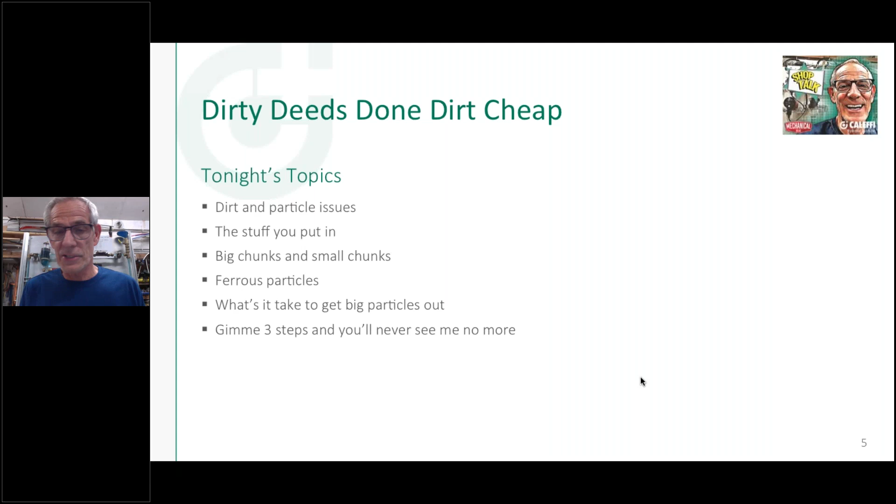I wanted to clear up a couple things I talked about last week. One of the things that's going to come into play a lot as we talk about things is the velocity of the fluid going through the system, the speed of the water, basically miles per hour - think of it that way. We talk about velocity of fluid in feet per second.

And when we start sizing pipe, I found if you go to this website, engineering toolbox.com I think, they have all sorts of calculators like this one right here, because I know there's some rules of thumb, like how much flow can you put in a 1-inch pipe, or a 1.25 inch pipe - is it steel pipe, is it copper pipe, is it PEX tubing?

I think if you go to calculators made specifically for that tubing, you'll find out you can get some pretty good flow rates. Like right here, I've heard for years that maybe 12 gallons a minute is about the best you can do on 1.25 inch copper. Well, actually, if you look at type M 1.25 inch copper, you can get up to about 18 gallons per minute, about 17 gallons per minute, and still be at that 4 feet per second velocity, 18 gallons per minute, and still be around that 4 feet per second velocity.

So where you can get a little balled up on this, if you look at PEX, because the inside diameter is quite a bit smaller due to the wall thickness, even though the outside is still copper tube size, you can see what happens with 1.25 inch PEX. So don't use a rule of thumb and say, if I use 1.25 inch tube, I can get X amount of gallons, 15 gallons a minute, whatever it might be.

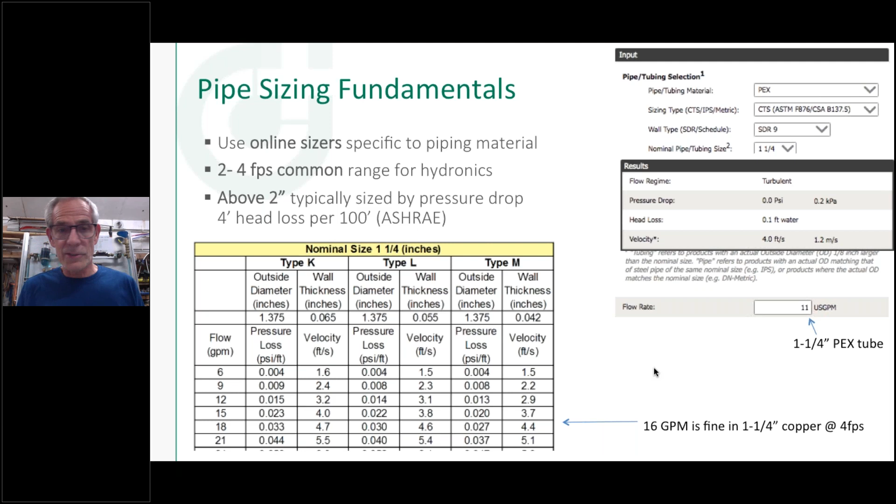This is going to be important too when we talk about flow velocity, whether you get turbulent or laminar flow conditions going through a pipe. I've got some examples of that coming up, because that has to do with how we transfer heat, and also how we get air and dirt out of solution if the water's going too slow or too fast. Going too slow, it doesn't move the dirt with it. Going too fast, it just blows it right past your devices that are intended to pull it out. So we'll look at that a little bit more.

The other thing, I got a little heat on this last week when I talked about these scoop type air purges. I said I didn't think there was a place for them in today's hydronic systems. Well, there kind of is. If you're doing cast iron boilers, this type of air elimination device works.

It doesn't get these little micro bubbles out. And to me, it's kind of like a rotary phone. Or would you buy a new pickup truck and say, I'd rather have a carburetor than fuel injection, I'm just used to that, I know how they work and this and that? Probably not. You want the best performance.

So definitely, if you're using high performance boilers, high efficiency boilers, I would go with a micro bubble type of device, because I don't want these little micro bubbles in there anywhere. So I just wanted to clear up that I'm not an air purger hater, I just think there's a better technology. I understand there's a big price difference between those two, but high performance systems require high performance air elimination.

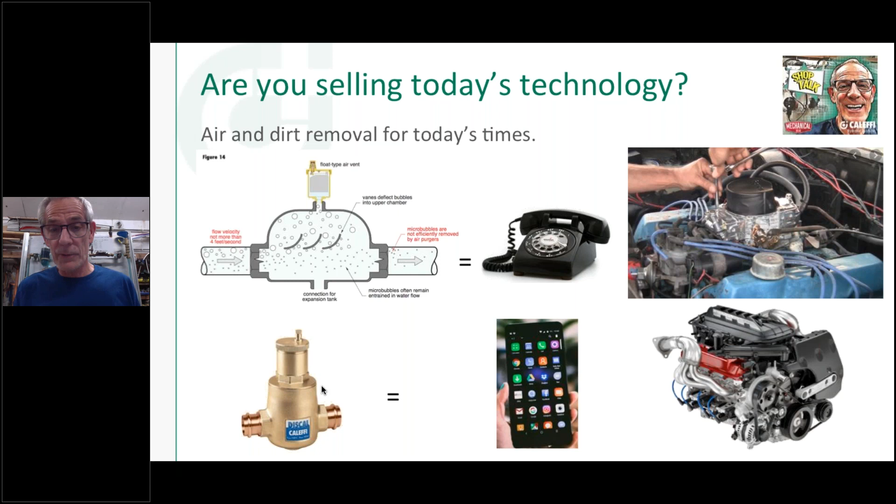Dirt elimination is what we're going to get into next. It turns out it's really about the same concept, the way we get air out and the way we get dirt out, when you see how we talk about separators instead of strainers or filters.

One last thing about these air purges: there's another thing we talked about, you want to have a little bit of upstream piping if you're going to use this type of air purger. I've heard it said a couple times that people say you want to do that so you have laminar flow here. And no, you don't.

The only way you get laminar flow here is you slow the velocity down in that pipe. In a 1.25 inch pipe, you've got to be down to about a half gallon a minute flow rate before it turns laminar. So you're not getting laminar flow just by putting a straight section of pipe in there. What you are getting is the ability for these little bubbles to start rising up, and the buoyancy of the bubble in the water takes it to the top.

So when it gets into this big wide chamber, you already got a head start on getting those bubbles up to the top so they can get to the air eliminator. You want to have that 18 to 24 inches upstream so the bubbles start to rise to the top of the pipe. It's not slowing the velocity down by having a straight section of pipe. So just be clear on that.

This is what we're looking at when we talk about laminar flow, transitional flow, and turbulent flow. If you're flowing between 2 and 4 feet per second in any size pipe, you're going to have turbulent flow, which is what we want to move the heat out. When we get to the demo, you'll actually see that. In my clear tubing, you can see how the water swirls through there as it goes down through the piping, indicating turbulent flow in the range we're going to run at, which is about 4 feet per second.

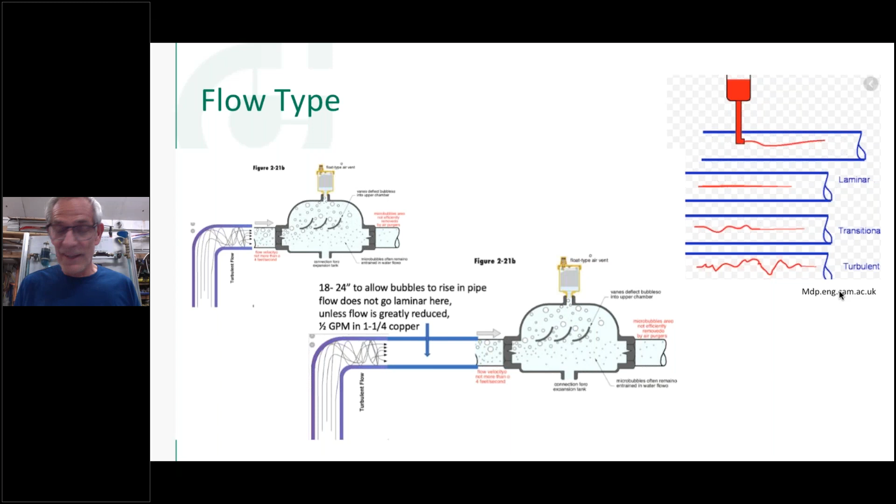So just to get that off my mind, to make sure I didn't upset people when I said I didn't think they worked very well.

So I want to make sure I put a device in there to be able to grab that, because I don't want that in my system, I don't want that in my pumps. I'll show you an example of what happens when you do have magnetite and you put an ECM type circulator that has a strong magnet in it. Guess what?

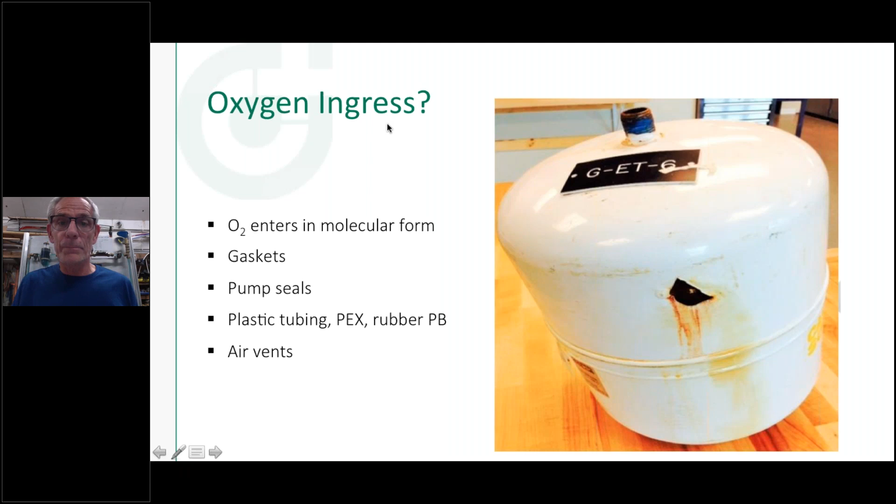So again, we talked about oxygen ingress last week - how it gets in through non-barrier tubing, how it can get in around packings on valves and stuff like that. So it does tie into the dirt and particle removal, because this is what's going to happen.

Now, I'm pretty sure that didn't leave the factory looking like that. Looks like a tank vent there. So whatever's caused this thing to plug up, it's probably not going to do a lot of air removal in that condition - something in the system caused this to happen.

And number one, we want to prevent that. We want to find out why this had so much sludge in the system, and we want to stop it, whatever it takes - we've got to tighten up our system. But also we want to make sure we've got a separator in there, so that if there is some of this going on for a period of time after we flush it out, we pull it out of harm's way. We don't want to trap it in a pipe or a strainer where it can plug up our flow rate. Now our boiler is going to go into lockout.

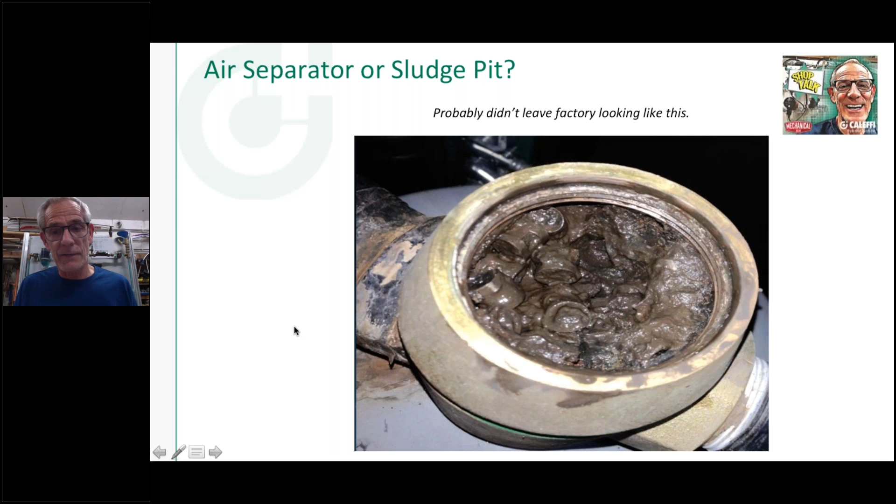Our pumps are going to start screaming and protest because they're not getting enough flow to it. So - I don't think I've got it keyed up yet - we're going to do a session on water quality.

And water quality will tell you a lot about why this happens in your systems - why you get that sludge, why you get that buildup, why you get this. Obviously this has been leaking, but these minerals that you see on the outside are an indication of what's in that water that's in your boiler.

So here, maybe you're lucky that this leaked, and you can see all these minerals in your water, because you really don't want those inside your boiler, your pumps, your piping. So we're going to show you in another water quality webinar how to deal with that and make sure that's not going on the inside of the pipes.

So probably the first place you're going to look when you see a problem like this is that one of two things happened to this boiler. I don't know if you can see it in the picture, but there's actually water spraying, squirting up - there's a couple pinholes in this.

And the first thing you're going to notice about this little Giannoni heat exchanger is, number one, it's been overheated. Just looking at it, you can see how some of these tubes are burned pretty black. Some of them are in pretty good shape up here.

So one of two things has happened: either this boiler didn't get enough flow going through it to scrub the fire into the water instead of into the metal like you see here, and either you had some airlocks - maybe some of these loops never got purged out completely - maybe there's enough flow just to keep this boiler going, but it was running too hot.

Or there was some dirt and debris that got in there and started coating out those tubes, and now you weren't getting good heat transfer from the burner into the heat exchanger there. And I actually have a little demo of that - I don't know how well I can show you this on the camera.

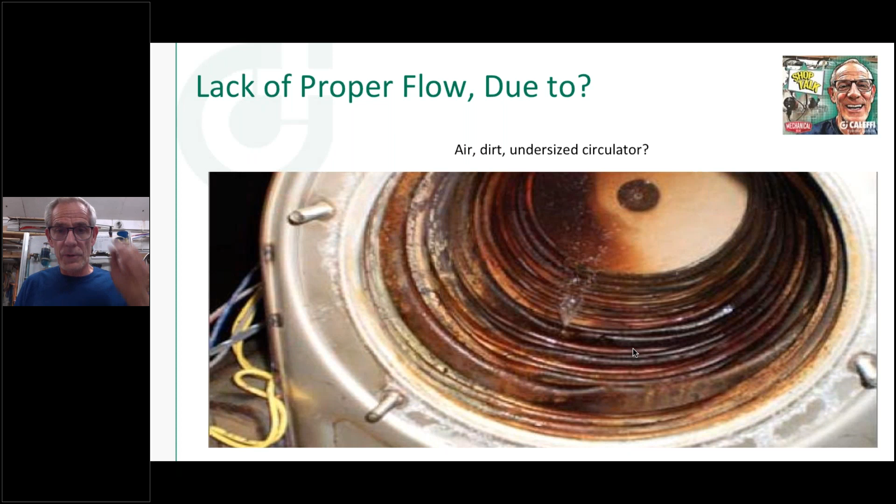Hey Bob, this is Kevin. Got a question from Bill D'Agostino. He asked if you mentioned about air getting in through the PEX tubing. What about those plastic PEX fittings? Are they going to let some air into the system as well compared to the brass fittings?

Yeah, I think he's talking about like a PEX composite fitting. That's an excellent question. I see Max is on here, I should open up his mic and maybe he could address that. He works for Rehau, but I wouldn't think so. I would think if they were using that for a hydronic application, it would have a barrier so oxygen wouldn't get through. I'm going to find out myself, because that would be a concern if you got all barrier tubing, but your fittings are allowing oxygen to migrate through the wall of it. I did clear that up - I talked to one of the experts at PPI after my last session. I asked, did I present that properly when I talked about how oxygen can get through the wall of tubing even though air can't leak out or water can't leak out? He said yeah, it in fact does migrate through the wall of tubing, driven by temperature also. So I'll find out a little bit more. Maybe Max will type in a response or call me here and let me know what the scoop is on those composite fittings we're using for PEX. Excellent question, by the way.

So again, here's an example of a boiler that was taken out of a job in Indiana, and it was going to be replaced by a similar boiler like this here. Obviously this is going to cause a problem if you put it inside of this tube. So number one, you're going to have to purge all this. This was an old iron pipe, cast iron radiator building in Indiana there. You're going to want to purge as much of that out before you put this new boiler in, otherwise it's just going to plug these tubes up, and within weeks or months you could have a failure on that boiler if this rust and scale coming out of the pipe, coming out of the radiators, is getting inside here. So a good power purge first, but also I want to put something to protect this boiler and these small tubes from any flaking that's going to go on after you leave. Because as we all know, cast iron radiators are going to flake off probably for the rest of their life. So we want to have something in there to protect your components from that.

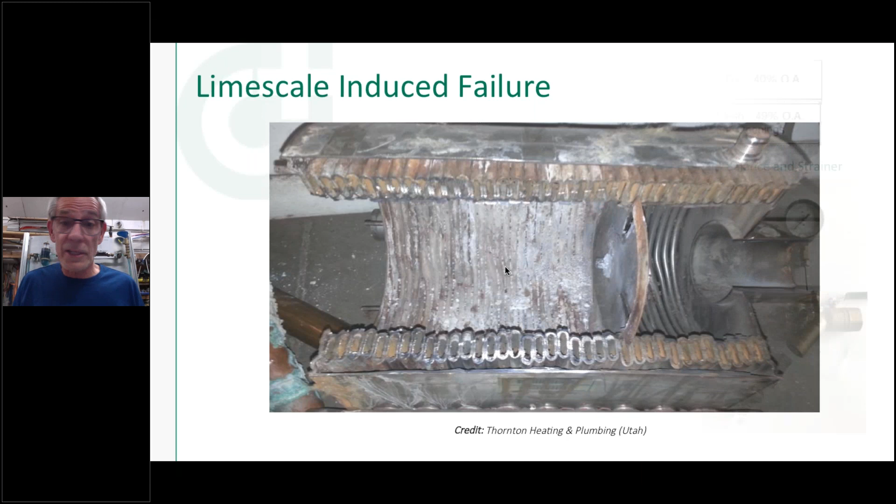So what we've been doing for years is a device called a Y-strainer. I've got an example one here, and it's a simple enough device. It's just a Y-shaped fitting like this, and we put a mesh in there. The flow comes through here, and it has to go through that mesh to get to the other side. So this basket will trap the materials in there, which is a good thing.

They work fine. The limitation of this type of device is as the strainer starts to plug up, you get more and more pressure drop going across that Y-strainer. So if I've got a pump or a boiler downstream from that, eventually I'm going to start reducing flow.

Now, when you buy a Y-strainer, you can buy them with different types of mesh. This is typical of the ones you probably find off the shelf — what's called a number 20 mesh. What that number means is if you measured an inch of that and counted the holes, it would have 20 holes per inch. That's what a number 20, 40, 60, or 80 mesh is — a coarser mesh would obviously be a number 10.

You get down to a certain size and they go to a perforated metal instead of a screen. Usually those are rated by the diameter of the hole in it. So that would be, as you can see, an 1/8 inch hole on this type of perforated metal instead of a mesh strainer.

I like to use a Y-strainer as a point of use device. By that I mean, if I'm going to put an air handler in, I'm going to put a balancing valve or zone valve on it. If you look at the opening in the side of this, it's one of our 127 balancing valves — a dynamic balancing valve.

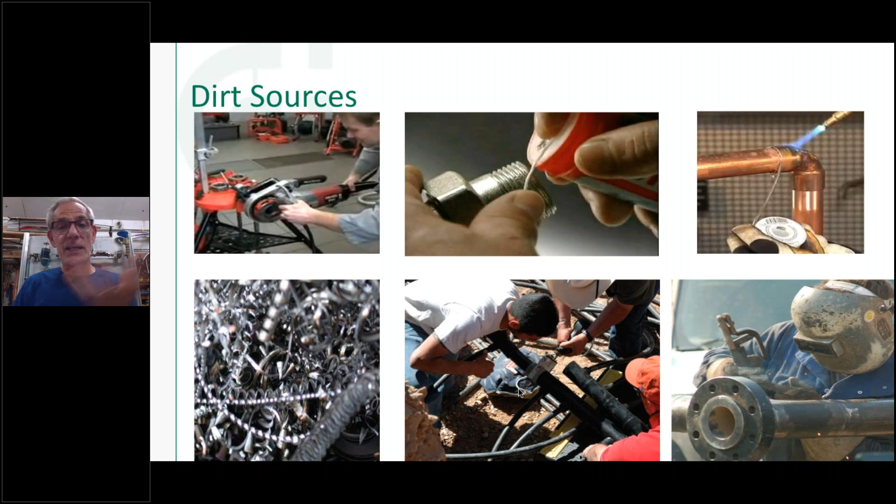So this is what we put in the systems. In addition, what's in that boiler when you get there - the boiler Kevin took out of those previous pictures - this is what could be in there. If you're threading your pipe, you might get some of that in there. If you're using Teflon tape, especially if you go off the end of the nipple and screw it together, you've got Teflon tape inside your system. If you're welding, grinding, reaming with a pencil reamer, or cutting with a bandsaw, all that stuff's going to be in your system. So we want to, number one, flush it out the best we can when we start it, but we also want a device that's going to keep track of all that stuff as it goes around in our system for years and years to come.

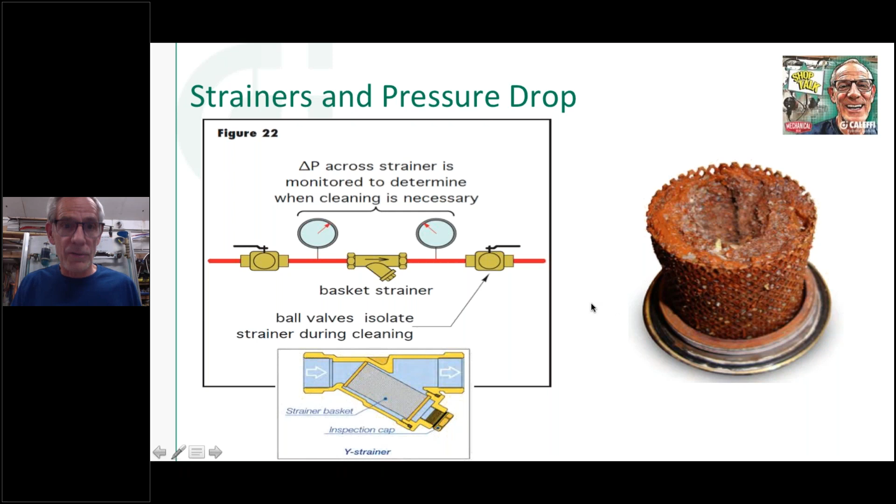Sometimes you can just blow them down here with a valve. Sometimes you actually have to disassemble and pull this little strainer right out and take a toothbrush or something to it and clean it off, because when you get 70% of it plugged up like that, you're going to have a pump that's starving for flow, or a boiler that's going into a high temperature lockout.

In fact, this was just on Heating Help, oddly enough, two days ago. Somebody wrote in, 'My indirect tank, I'm not getting very much performance - it takes hours for it to catch up. It never used to do that.' He sends in a picture, and the first thing everybody who knows this sees is there's a Y strainer. We said, 'Have you ever checked that Y strainer in the, I don't know, 15 years or whatever this indirect tank has been in there?'

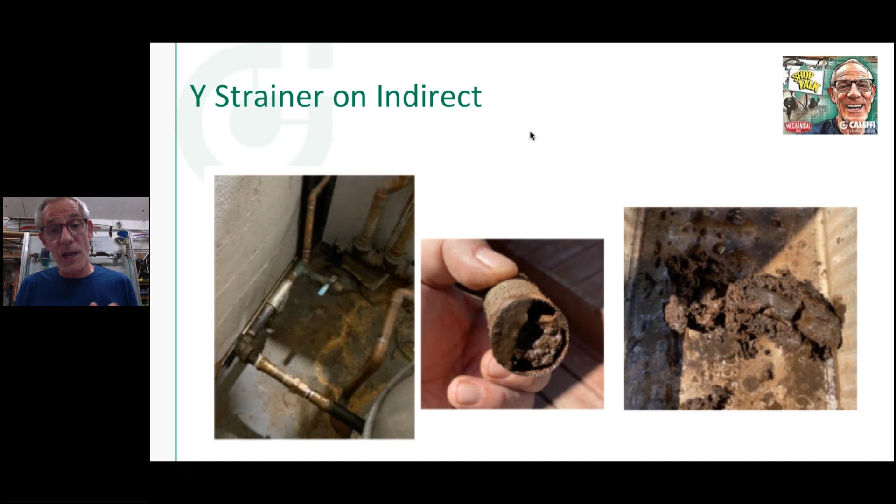And he said, 'I've never had a problem before.' Well, it wouldn't hurt to check it. And certainly that's what he found when he took it out of there - that's on a piece of paper. So obviously that wasn't allowing a lot. I'm surprised he was getting any recovery out of that indirect tank with that much sludge built up inside that Y strainer. So the Y strainer had done its job - it's just nobody ever went back to service it and take it apart.

So if you were to go buy a brand new Y strainer tomorrow with, say, a number 20 mesh in it, and you put a flow test on that and took a pressure gauge like I just showed you, you would see a brand new Y strainer just out of the box is going to have about a pound and a half of pressure drop to it. And that's because the mesh size of the strainer is just reducing the flow through it.

Now, when that strainer gets plugged up like this, the one we just showed you previously, let's call that 70% of the mesh is plugged up. Look what happens to the pressure drop. Think about that. If you've got a circulator that can only develop about 6 pounds of pressure drop, you've got no flow going through that strainer. So somebody has to go and service that strainer. There's probably a lot of Y strainers out there as we speak that need to be serviced. They might not be plugged up this bad, but the performance of everything in your system, your boiler, your pumps, your heat emitters, are all taking a hit because they can't get sufficient flow through them.

So with that in mind, we came up with this idea. We said, why wouldn't we put the same concept to use that we do in our air separator? I think we talked about this last week. So there's an air separator, and inside this air separator is this coalescing media that we put in there. Can you see that okay? So what if we took that same philosophy of slowing the flow down as it comes in, and what if we took this off the top of it?

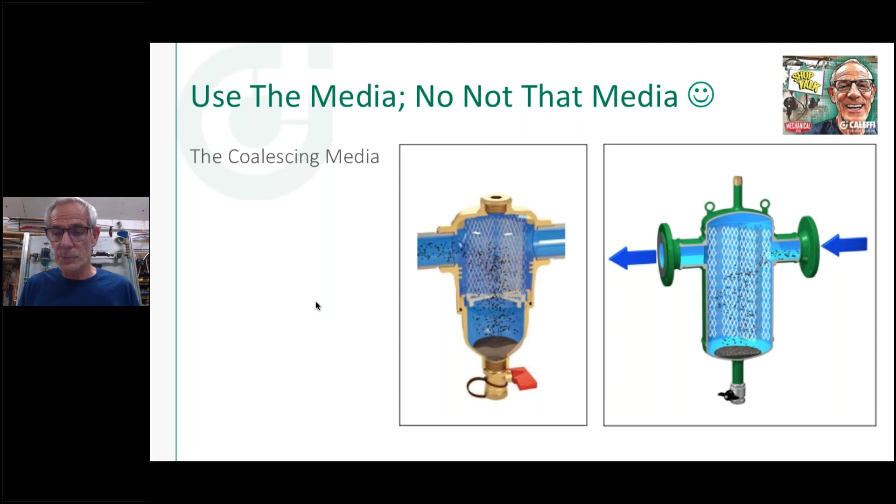And we make different ones. We make these up to 2-inch in a brass version. After that, it gets to be a lot of brass, so we go to a welded steel vessel. So we've got these anywhere from 3/4 inch up to 14-inch pipe size. So if you've got an application where you want to try a separator, maybe you've got an older system that you've had a lot of problems with, let us know. And here's an example of the range that we can cover on these separators.

And what we do when we test these, we run them at a typical 4 feet per second. I mean, that's usually the high end of what's accepted in a hydronic system. We want to be between 2 and 4 feet per second, but we'll run these things out to 10 feet per second velocity, which is way beyond what you would typically have, but it could happen.

So we check the performance. We actually bench test these at these flow rates to make sure that even if somebody overpumps one of these systems, we're still going to get good particle removal out of it.

Both of these are magnetic functions. This is the one I'll show you later on the display with the magnetic band. This one has what looks like 3 magnets going up inside of it that collect those fine particles as they go through.

So all of our magnetic separators started life as a dirt separator, and then we added the magnetic function. We feel we do a better job getting stuff out with our separator, and the magnet is the bonus to get those little fine particles, because it seems like the race is on to put a bigger magnet in—more magnets or bigger magnets than the Caleffi brand.

Well, we don't need a big magnet because we're using that coalescing media, which swirls it a little bit in there—you'll see one right behind me when we do that demo. The magnet is just getting the small particles that the coalescing media has a hard time getting, anything below about 5 microns. It's pretty tough to get that out with the media, so that's where the magnet comes in. I'll show you why that's so important in a couple of slides.

I think it's an ASHRAE standard that tells you the acceptable velocity on larger diameter pipes based on the pressure drop, not on the flow velocity going through it. It's usually about 2-inch pipe and larger where we'll get away from velocity sizing.

Bob, can I interrupt you for a minute? Yeah, this is Mary, please do. We have a question from Flavio. Flavio, if you unmute yourself, you can ask Bob directly. Excuse me, whoops—I've got too much stuff on my mic here. Okay, can you hear? I wasn't able to unmute him. Okay, I'm sorry, keep going then. That's all right, well, type it in and we can try again later. Sometimes we've got to unmute you, and then you have to unmute on your end too—it's kind of a two-step process. So we can try again, or type it in and Kevin or Mary will read it off.

Knowing that a lot of the new boilers are wall hung and the piping either comes out of the bottom or the top, we decided to come up with this device that can go on a vertical pipe. In fact, if you loosen this collar, you can make it vertical or horizontal, so it's nice that way—you can get it into a tight spacing if you've got to get all your piping right under the boiler.

Right now this is available in a 3/4 and 1 inch version. It's super easy to put in, and if you shut off these two valves, you can actually blow it down, and this lid you can open up by hand. I'll show you the one on the back when we get going, and you can actually reach in there and pull the mesh out.

Benjamin asks, do steel dirt mags as opposed to brass work as well? Wouldn't steel construction interfere? Yeah, that's a great question, because you'd think, well, isn't the whole thing turned into a big chunk of magnet? So what we do on the steel ones is this is actually a brass dry well that goes in here, and the magnet goes into that brass dry well. So the magnet isn't against the side of the metal, because yeah, you could turn that whole thing into a magnet. Then how do you get the stuff out of there?

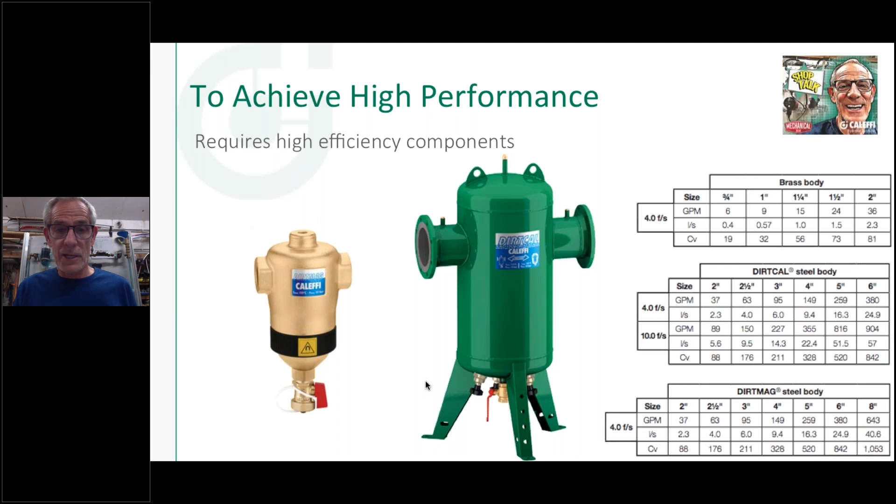So what it does on the steel ones, if you unscrew this right here and pull it out of the dry well, it's segmented so it can break, so you can get it out if it's close to the ground. When you pull those magnets out, everything settles to the bottom, and then you just open the flush valve and it comes out. Now Kevin, if you want to add anything to that, but that's the theory of how the steel vessels can work with a magnetic separation function on them. Oh, that's good, all right, thanks. Glad you said that.

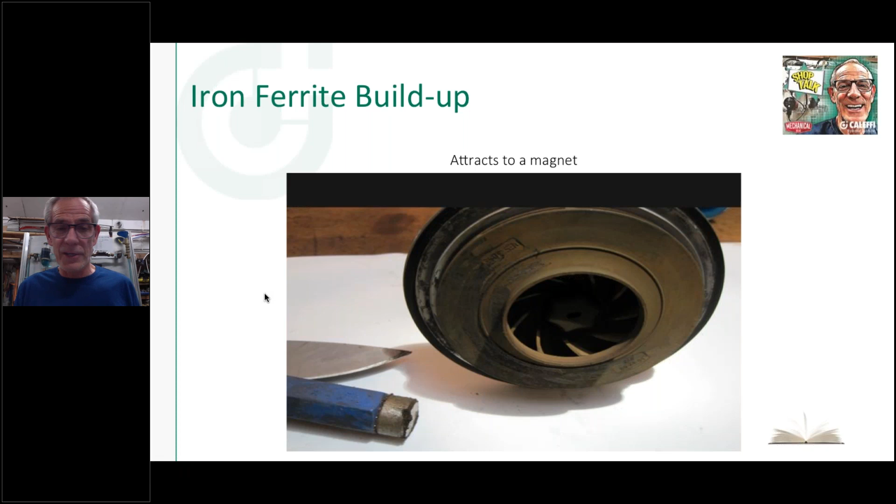This can be a problem if this pump is going to get changed out with one of the new ECM pumps, because these little particles - I'll show you what can happen to them if we've got a strong magnet somewhere in our circulator pump. So it's a simple thing to do - you probably have a magnet on one of your screwdrivers already that you could use to do a test like that. Here, doesn't matter what brand it is, this is what's called a wet rotor circulator.

And the way a wet rotor circulator works is there's a hole through the center of the shaft, and that impeller at the end - the water goes through that, and the water that goes through it ends up inside there. That's why this is called a wet rotor circulator, because this rotor is actually spinning in the water that's trapped inside.

This is called the rotor can, and this is called the rotor. When you take your pump motor off of here, you need to get a couple of screwdrivers in there and wiggle it to be able to pull that out. They come out a little hard because that bearing goes into a bushing. So it does take a little bit to pull it out.

The way this type of circulator works is there's a really strong permanent magnet motor in there. If you have something like this, you put it in there, guess what happens? Kind of looks like the bearded man on your Etch-a-Sketch. Those particles get pulled to that magnet, and that magnet's trying to run inside there, so you can imagine what happens is that's going to bind up that rotor inside there.

So if you've got a circulator that's slowing down, all of a sudden you're not getting the flow, or maybe it even spits out an error code on its digital readout. In fact, in the picture there was actually a pump that we took out of a system that was having issues, wasn't spinning. What happened is this fine powder, iron ferrite, magnetite, was being pulled through the center of this and attracted to that magnet, and it was locked up in here.

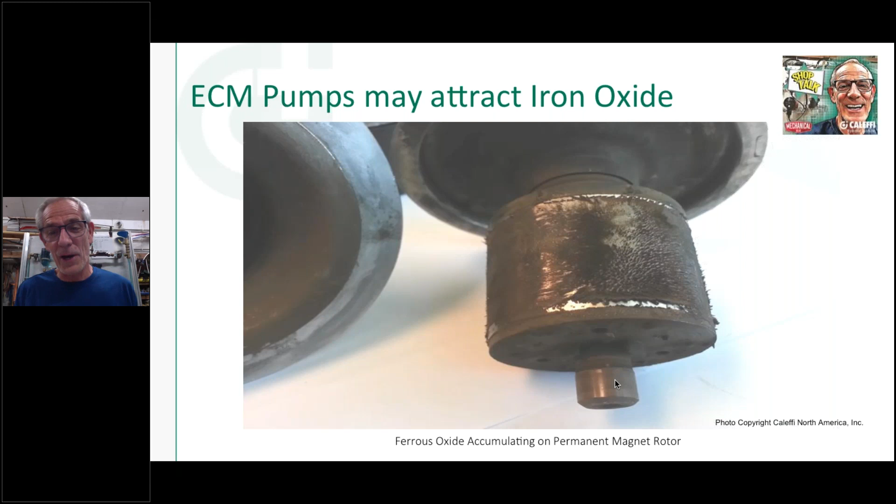I've got dozens of pictures like this. This is actually in our building in Milwaukee, and this is an expensive pump, like a $1,500 circulator. It's a larger pump, and we had one fail, so we called the manufacturer, and they said, oh yeah, send it back, it's just a software issue, we'll replace it, no problem.

I happened to be up there the day that this happened. We came in, the building was cold. We weren't getting any heat.

I go into the room and see this one pump is flashing lights. I don't remember exactly what the error code was. I said, that's odd that the second pump would fail in 2 years after the first one. Something else is going on here.

I said, let's take it apart before we send it back and see what's going on in here. So I took the bolts out, took the motor off, took the rotor can off, and that's what I found. I took a white paper towel and wiped across that, and I had a palm full of this black powder. It was almost like if you take a pencil and sharpen it with a pocket knife, that's the type of particle size we're talking about here.

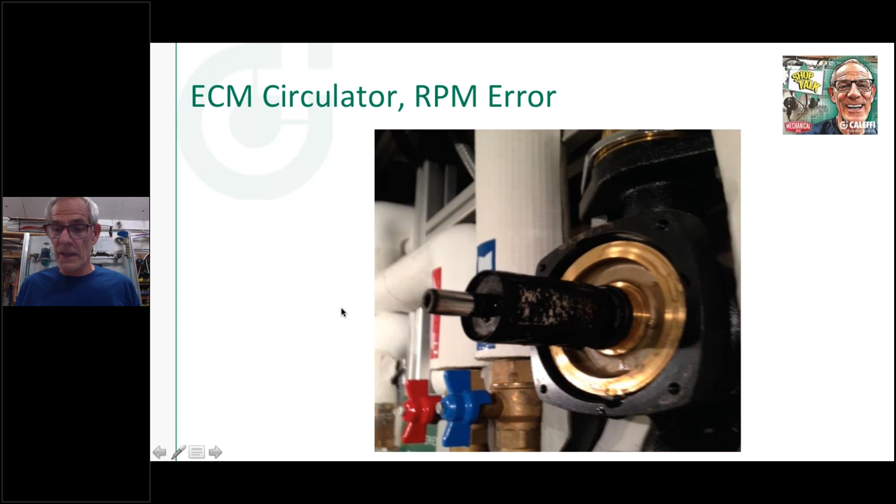So it goes through the system and gets attracted to this magnet, and it's locked up the second circulator on the system. My bigger concern is where it's coming from, because I should be treating the problem, not the symptom. The symptom is my pump stopped spinning. The problem is where the magnetite is being formed in the system, and it's coming in through the non-barrier tubing. The oxygen comes in, which keeps breaking down my metal parts.

And we do the same thing for dirt, taking our competitor's product and putting it on a test bench to see how they stack up against ours. I will say, when we talk about these air separators, I don't see a huge difference from brand to brand. You'll see feature differences in the Caleffi compared to others, but with that mesh or media or rings or whatever technology our competitors use, they all do a good job of air removal, and I'd think the same for dirt removal.

I think we've got a bit of an advantage on our dirt separators in that we started out as a dirt separator, not a magnetic separator. We had the magnetic function added, so you really get a dual purpose device or function out of it.

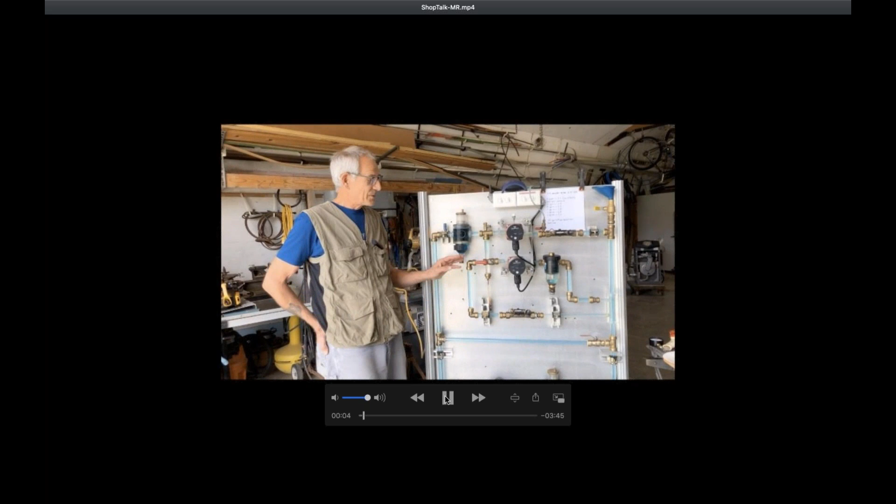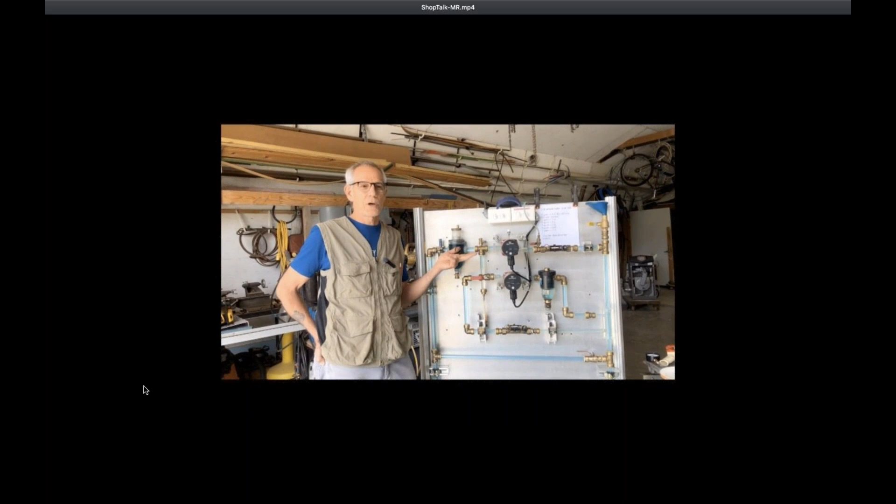This is a clear plastic hydronic display that I built, and it shows... let me talk about hydronics first. Hydronics could be a solar thermal system, it could be a geosystem, it could be a chilled water system, it could be a hot water system. Really anything that's a fluid-based water glycol heat transfer mechanism is what we're talking about in hydronics.

So this one here is just going to be plain water, with a little bit of color in it so you can see what's going on. Over here, this is kind of a clear plastic model of a Caleffi DiscalDirtMag. I do air removal up here, which I'll show you in a second, and I've got dirt removal in the center, which comes out the bottom here. I've also got a little magnetic band that gets very small particles, smaller than we could knock out with just the media side there.

So what I'm going to do is get this thing set up, and I'll show you how it runs here. If you move over here, I've got some flow going through there. You can see I've got about 6 gallons a minute going through that. I'm going to go over to the side, and I'm going to put some particles in. I'll show you what they are.

And we're going to fire it up, and you're going to see that stuff come around, and you're going to see how the separator over here works for particle removal.

Let's go. So what I have here is a sheet of typical stuff you would find in a piping system. I've got some copper that I cut with a chop saw, so it's pretty coarse. I've got some copper here that I cut with a band saw, so it's pretty fine. And then some of this other stuff here is actually a 400 grade stainless, which is nice. It's magnetic, but it won't rust and turn all my piping red inside. So got some sand in there, good dirt, typical stuff.

So we're going to gather all this up, and we're going to put it in that system, and we're going to fire it up, and you'll see how all this is going to come out in that separator, both the fine particles, the big particles, everything you see on this sheet. So that's phase 2. Let's get going.

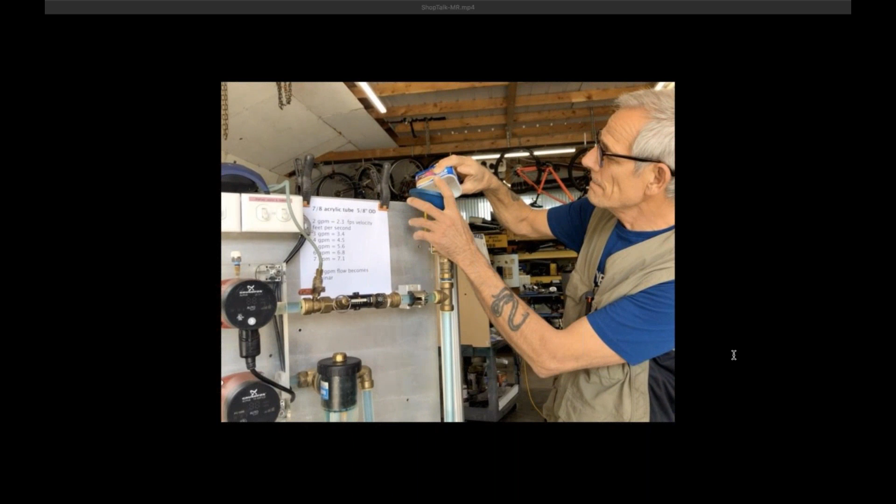So we put a little debris in here. See it coming down here. Let's get our pump started up. And you can see it going around here. Now you'll see it coming out. Let's go over to the other side.

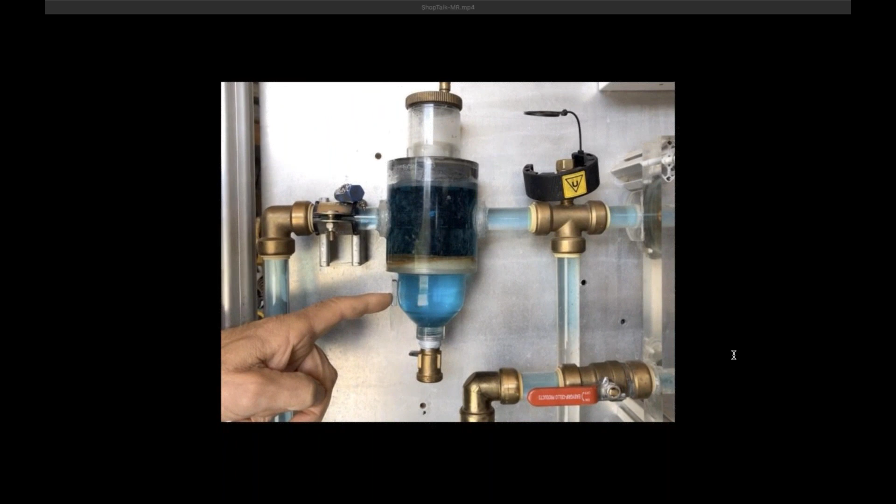It's going to take a minute or so, but you see how the stuff hits that little media side there, which drives it down. And this little magnet I just taped down so you can see it when I pull it off, a little bit better visual of all the stuff coming around through there.

So everything I dumped in is now going to separate, and then I'll be able to blow it out here in a second. Actually, if I had an accurate scale, I could weigh what comes out. It'd be pretty close to what I put in there.

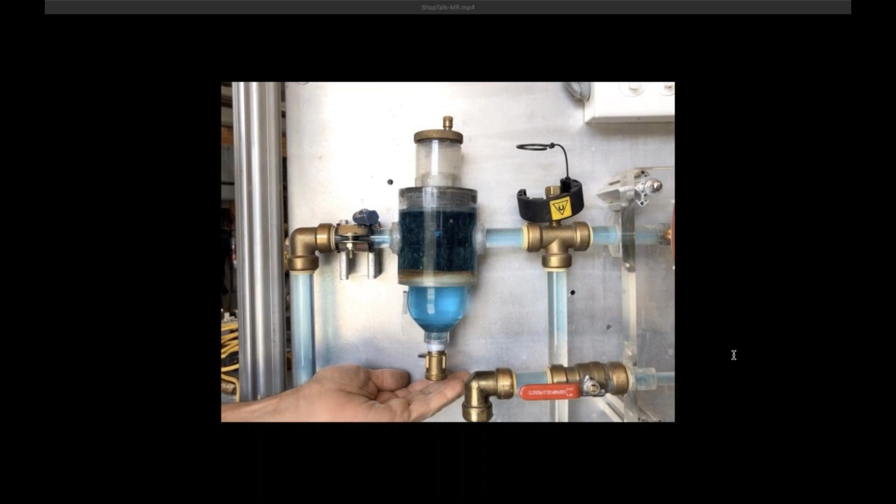Some of it's getting trapped, as you can see where I glued this together in there, but most of it's going to end up down here. So you can see some of the PVC chips and some of the wood chips, the lighter particles are starting to come out of solution there, and then you can see them all falling down here.

So let's let this run for like a minute, and then we'll come back and we'll show you how this blows out, and we'll show you all the stuff that comes out of it.

So what I've done is I've taken one of the magnets out of another collar, and I've just taped it onto that. It's going to be easier for you to see when I pull it off as trying to pull the whole band off. You can't see what's behind it. So let me show you what's going on now.

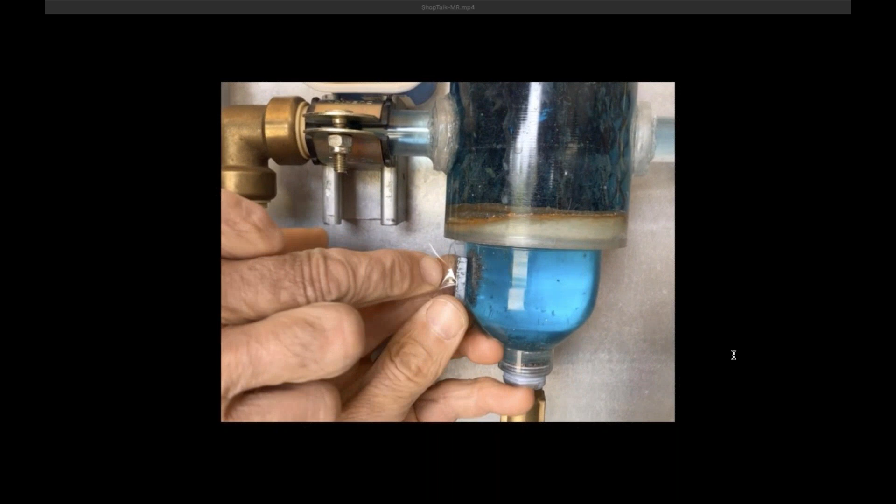You can see if I take this tape off, you can see all that stainless steel that I put in there. I actually move it around with the magnet. If I get the tape off here, give me a second. See how the magnet moves it around?

Now what I'll do is I'll pull a magnet. It's going to fall to the bottom, and then I'll show you how we flush it out. So it goes to the bottom, the cup down here.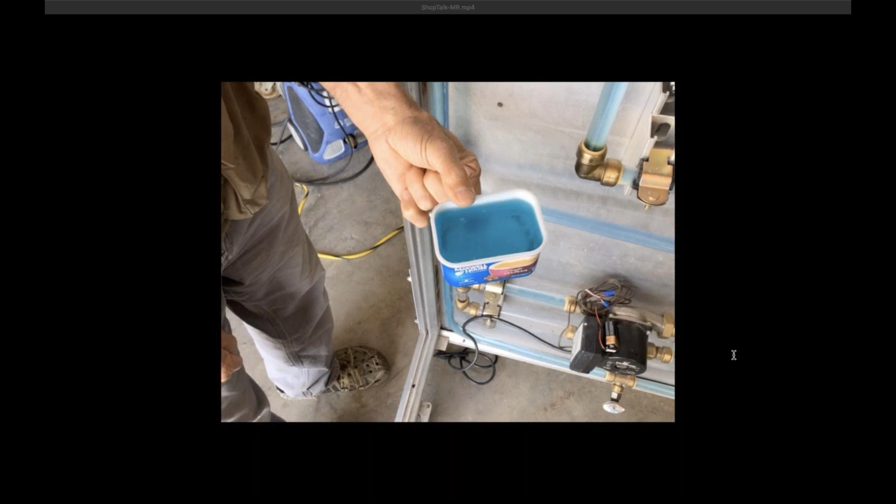Just open this up. Sometimes I run the pump to a little more pressure coming out of there. Well, you can see in there, but you can see how that particle that just dropped off the magnet, some of it's still in there. I got to flush it a little better, but typical hydronic system, you'd have a little pressure. This doesn't have any pressure on it to help blow it out, but it just gives you a good visual how these little magnets pull out those very tiny, small particles that you can't get out with just a regular strainer, regular separator.

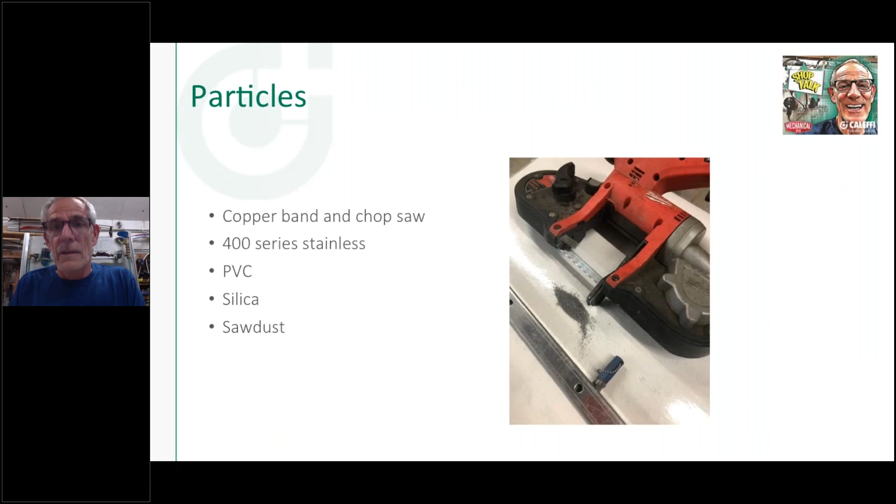That video is available on the Ask Caleffi website. If you go to Caleffi North America on the homepage, there's an Ask Caleffi menu item, and do a search for 'what does magnetite look like,' and you'll see that video that was shot at a facility here in Wisconsin.

Yeah, thanks. Here's what I wanted to show you too. I don't know if I explained it, but when we test this, we test it at different passages. So we look at the efficiency after 50 trips through the separator, and you can see obviously the further out you go on the smaller particle, it's going to take more trips around. We get these big particles pretty much the first trip around. If you look at the Dirtcal, the green line here, we're up about 100% efficiency on the big chunks right away. The smaller ones, 5 micron, the size of a hair on your head maybe, take a few trips around the system to get all those pulled out.

So it's not a one trip around thing. It could take a day if you've got a huge system for all those little particles. Don't stand there watching and say, okay, I'm going to blow it down before I leave and everything's going to be fine. On a big system, it could take a good day or so for all the fluid to make 50 trips around through that separator and start getting the small particles out.

Another question, Steve Martinez says: I'd like to install hydro air seps on all my boiler installs, what are your thoughts? Yeah, the hydro seps - I'm a huge fan of hydro separators. We've got the SEP4 that gives you great air elimination because it's got the same media we talked about this week and last week. We've got good dirt separation, we've got the magnetic band, and it's got the closely spaced tees, basically the 4 ports that make it a separator. So if you look at all 4 functions in one, and compare the cost of those 4 separate functions, if you're even putting magnetic separators on, it's a no-brainer. With that being said, not every boiler needs a hydraulic separator.

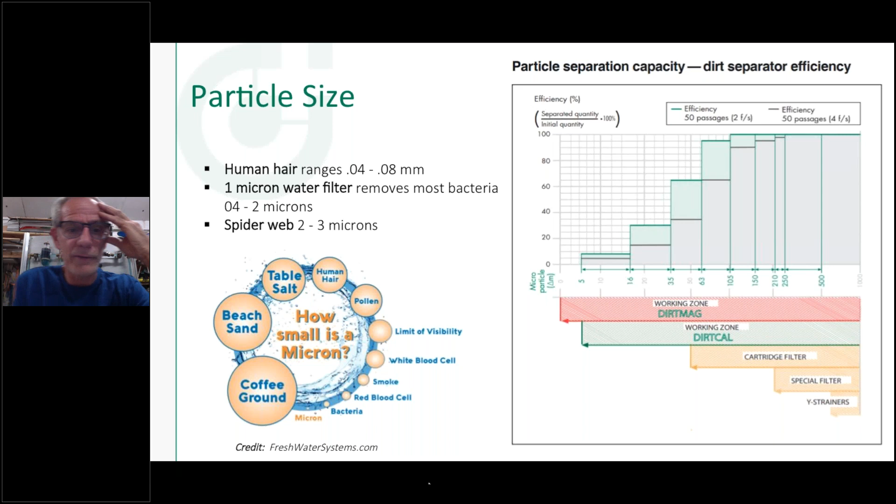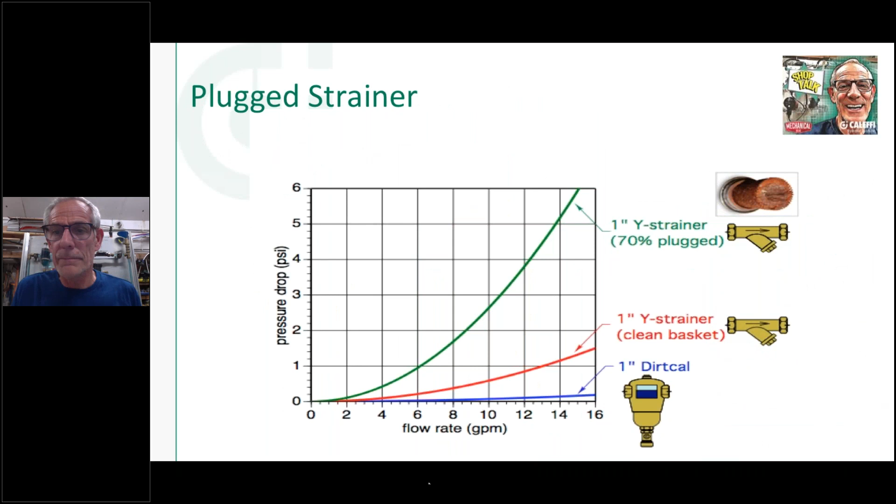Do you have any thoughts on that, Kevin? I agree with you. I think the flow should go in one direction. You're probably going to have a check somewhere in there, right? Yeah, well, most of the circulators have them now. I thought I had a picture here of a purge cart that I could bring up quickly, and maybe I did.

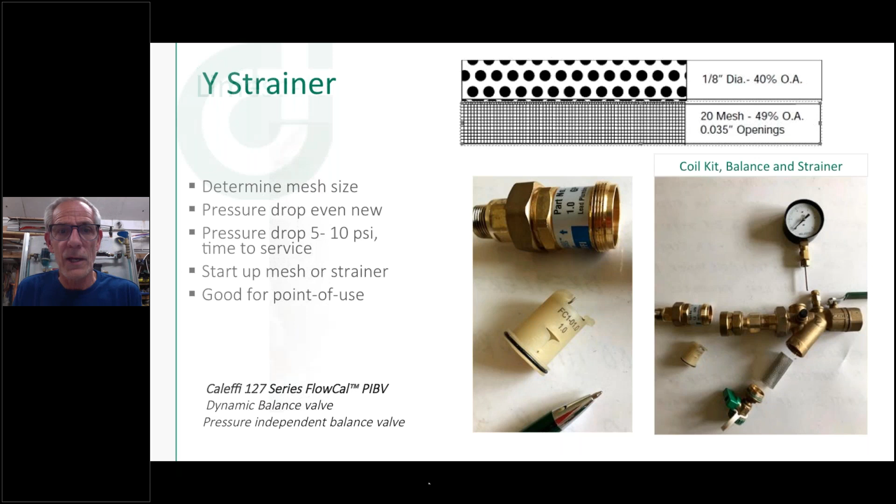It's too far back. Yeah, the hose on the separator, the valve's on the bottom of it, and the flow is going to come from wherever the fill valve is attached in the system. If the fill valve happens to be downstream from the system, well, yeah, the flow might be coming backwards from the fill valve to where the separator is. So usually when we do separators, we have the expansion tank and the fill at the separator, because that's a good point of no pressure change for the whole system.

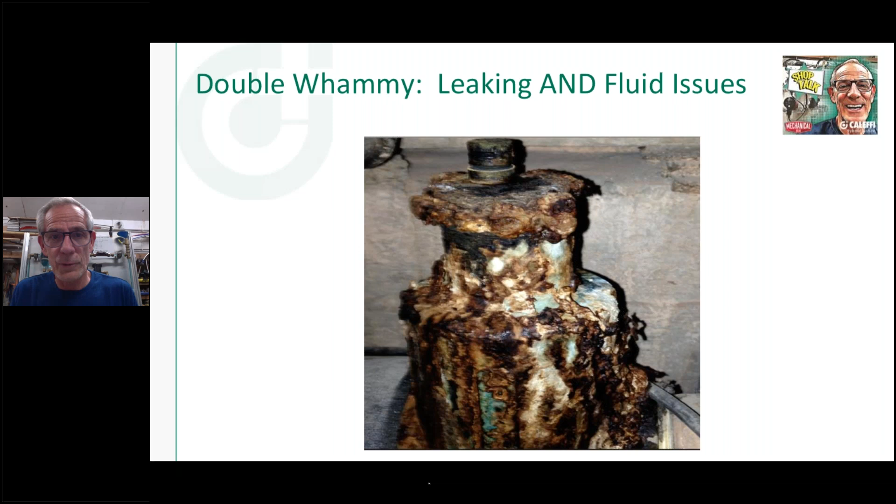Howard says, how do I watch this again later?